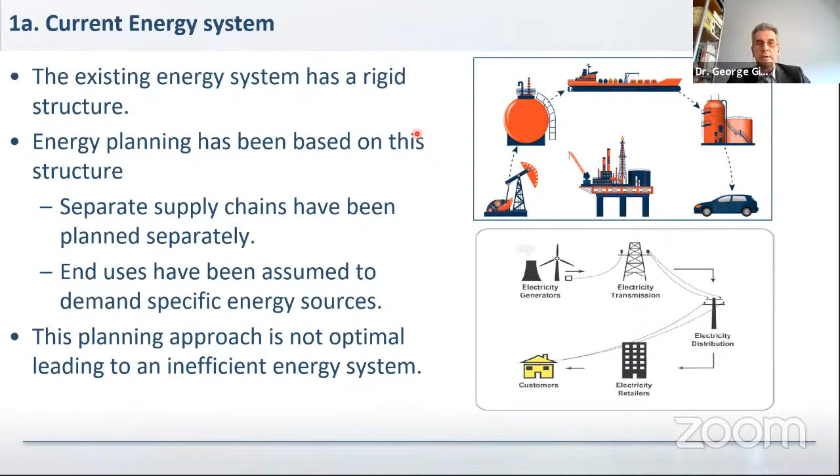But what we can see is that this overall planning approach, and the approach of operating the energy system, is not optimal. So it leads to an overall inefficient energy system. That's why we're talking about energy system integration.

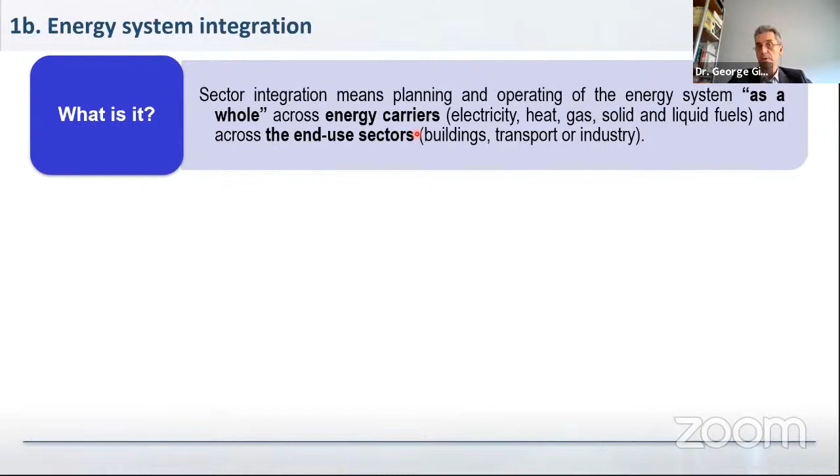So we are talking about planning and operating the energy system as a whole, as it should be, across the different energy carriers. We're talking about electricity, heat, gas, and solid and liquid fuels together, but also the end-use sectors: buildings, transport, or industry.

And why do we do this? Because in this way we will be able to allow the optimization of the energy system as a whole. So basically we'll be able to exploit synergies between sectors, and also help link new technologies, new processes, and new business models. We're talking about ICT, information communication technology.

We're talking about the digitalization of the energy system, the use of smart meters, the use of smart grids, and the flexibility market. So we're talking about new business models of working in the energy system, which can help in the overall optimization.

Is there an example? The easy example is the electrification of transport, which we are all talking about at the moment. It's not only the transport sector which is affected, it's the power sector which is affected, because we have new load curves and new demands that have to be satisfied. It's also the oil and gas sector that is affected, and the biofuels, because there have been a lot of plans for biofuels, for instance in Europe. So this could be affected through transport electrification.

And then we also have the other demand sectors, so the building sector, because the charging points could usually be in our houses, in our homes. So of course the load of the building sector would be affected.

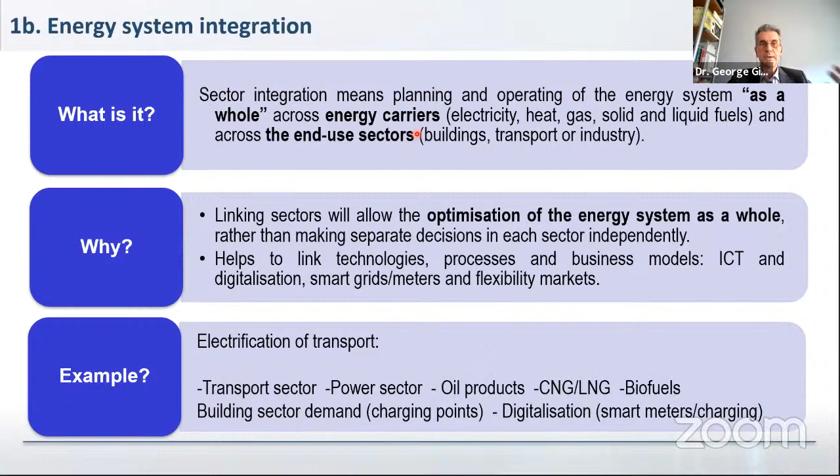And then we're talking about digitalization and how this can be integrated. Because how could the pattern of charging, or smart charging, actually contribute to the operation of the power system, utilizing car batteries as storage devices in the system overall? So this gives you an idea of how important this would be.

Dr. Ahmed mentioned the EU strategy for energy system integration as part of the European Green Deal for decarbonization of the energy system overall by 2050 in Europe. And what can be the core concepts overall?

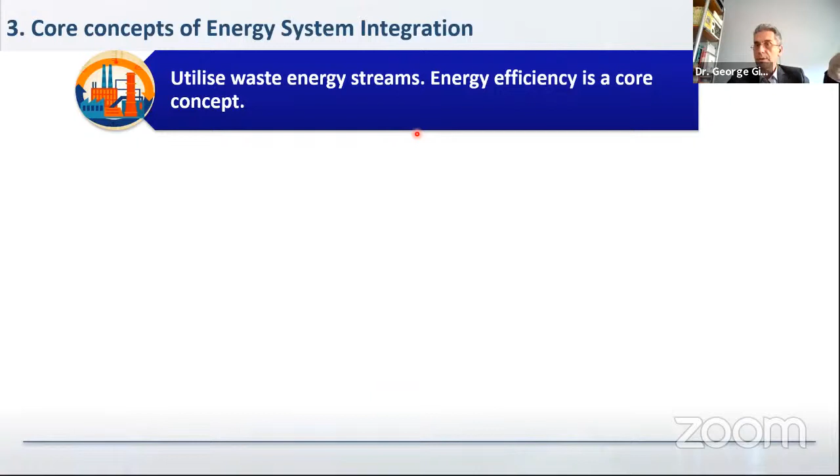What we're always saying in energy system planning is that energy efficiency is important. So the first step would be to utilize existing energy sources in the most efficient way, and to utilize waste energy streams—waste heat in industry—and use wastewater treatment as well, using energy from that.

Direct electrification of end-use sectors by utilizing more electricity, which is becoming cheaper because the cost of the technology is being reduced. This helps us put aside more polluting fuels that are being used in the end-use sectors. Use of low-carbon fuels, or renewable fuels generated through renewable energy, including hydrogen, for other end-use applications.

And what I've mentioned is the use of this multi-directional system. So far we are used to having an energy system where suppliers provide energy to the consumers. Here we're talking about new concepts.

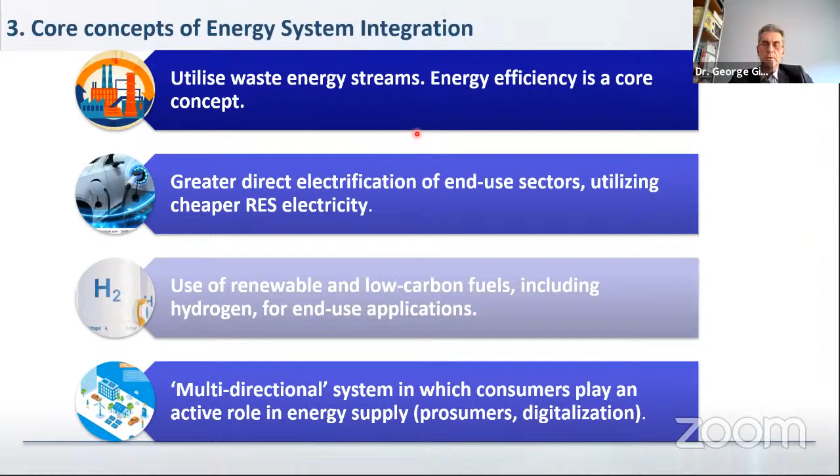We're talking about prosumers, so each one of us could basically consume and produce at the same time, contributing to the energy system. We have to take into account the tools offered by digitalization, the possibility to operate in a smart way, utilizing local generation of energy, not only electricity but energy in general.

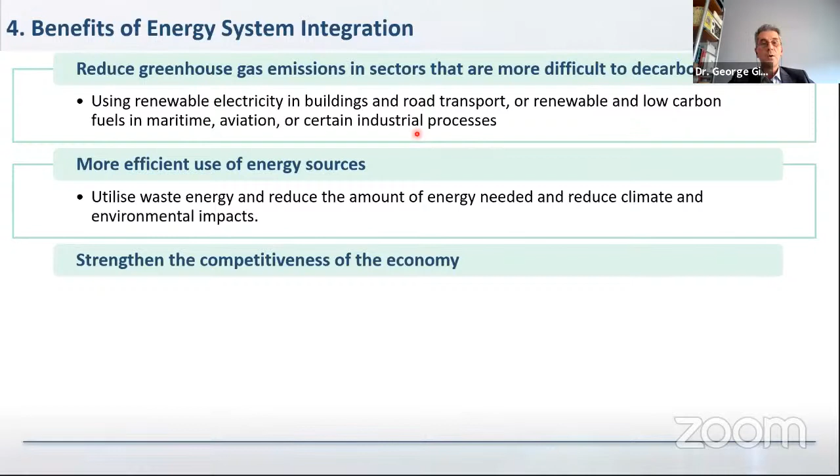What could be the benefits? The first would be environmental effects, which will be minimized—reduce greenhouse gas emissions by the use of renewable energy, but also utilize more efficiently the energy sources we have, utilize waste energy, waste heat, increase energy efficiency overall, strengthen the competitiveness of the economy by producing more sustainable, more efficient technologies and solutions, and provide additional flexibility of the system.

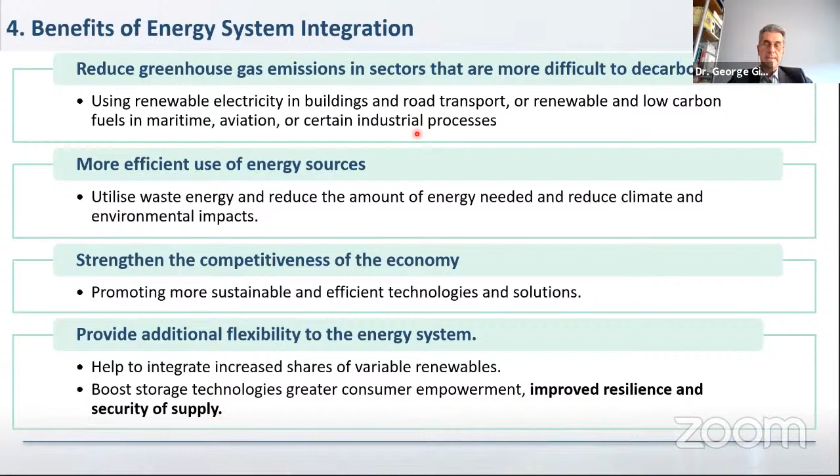We'll be talking about flexibility, especially in the power sector, quite a lot, but this can help integrate a larger share of renewables overall. It can boost storage technologies, and it can also improve the overall resilience and security of supply of the system by utilizing local energy sources and making sure that the system operates in a stable way.

In order to have such an integrated energy system, we need an integrated energy planning approach overall. We need a large amount of data, and a large amount of good data. Planning generally demands a lot of data, but if you do an integrated system planning, you need all the data from the different sectors.

We must take into account that it is an interdisciplinary and multi-sectoral approach. We need to really break down the barriers that exist between sectors and make sure that we collaborate, so that we can have a system planned based on the principles of sustainability, reliability, and affordability overall.

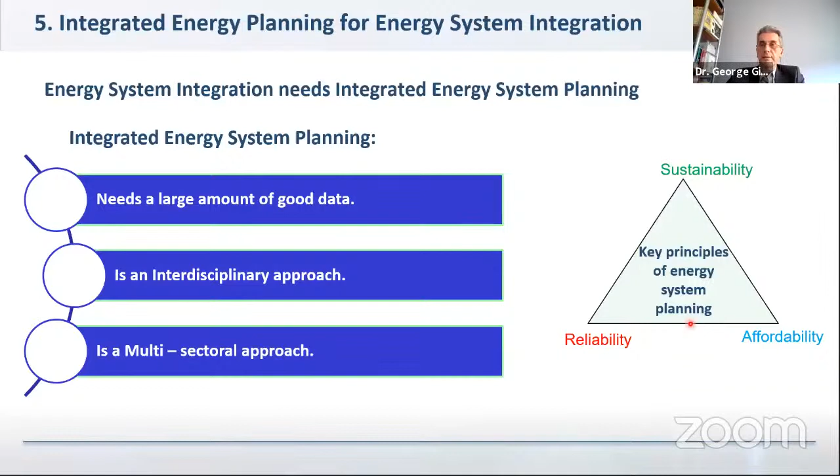Integrated energy system planning should take into account, first of all, an integrated energy system model. We have to look at all the different steps of extracting, transforming, transporting, and utilizing energy in the different sectors. We should also take into account decentralized energy generation, and the options of energy efficiency in the end demand sectors.

In specific sectors like the power sector, where variable renewables can play a significant role, we should focus in more detail by doing detailed power sector modeling, in order to see exactly how technically the system can operate, especially in cases with high variable renewables and high distributed generation shares.

In all these processes, we need to examine the effect of greenhouse gas emissions overall. We shouldn't forget that energy is an integral part of the economy, so the effects of the energy system on the overall economy should be taken into account. At the planning level, this means we should integrate macroeconomic modeling into our approach.

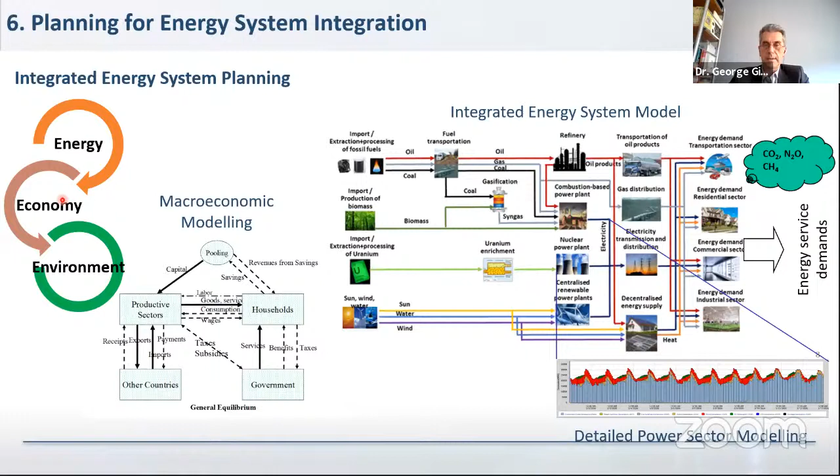To make sure that the effects of a changing energy system can be properly taken into account in the overall economy operation, within the current project we're basically utilizing such an approach for the update of the National Energy Strategy for Egypt, in the time horizon to 2040.

We're using an energy system model, based on the model generator called TIMES, developed by the IEA, which focuses on the energy system as a whole. We're also utilizing a macroeconomic model, medium to long-term horizon, in order to see what kind of effects a change in the energy system would have on the economy.

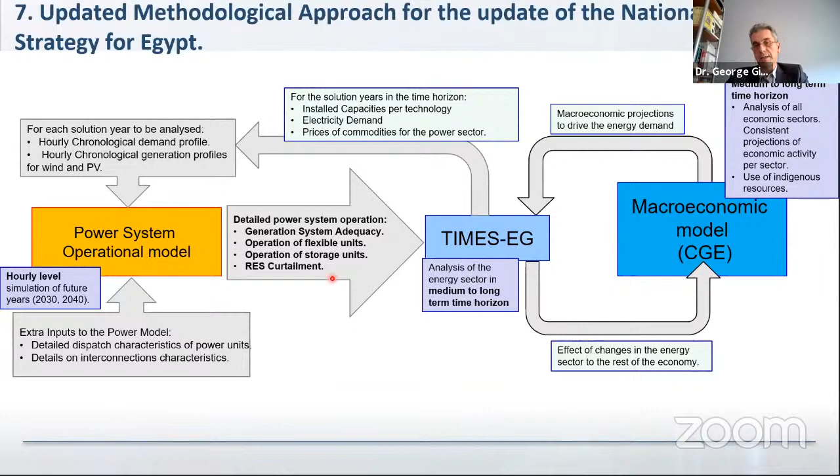We're also looking into a more detailed analysis of the power sector with a power system operational model, which does an hourly level simulation of the power system, to see if the solution, especially in the case of high variable generation, is technically feasible, and to examine in more detail the issues of generation system adequacy, flexibility of operation, storage units, and curtailment—the loss of energy generated by renewable sources in the system.

So overall, what are the advantages offered by integrated energy system planning? First of all, we can analyze technology and fuel competition and take into account fuel switching overall, model distributed generation—quite important especially in the case of variable renewables—and then integrate renewable energy, not only in the power sector, but also biofuels, with interlinkages to land use and water use.

Biogas, for instance, could be locally produced and then inserted back into the gas network, and also hydrogen produced by renewable electricity and then inserted into the gas network to be transported and used elsewhere.

Overall, integrated energy system planning will improve security of supply and system resilience, and the demand sector is an important source of flexibility in such a system, especially in the power system. Digitalization will play an important role here, and integration of local and mainly renewable energy resources in the system could basically improve security of supply overall. We should also look beyond the energy sector, considering water needs for the power sector and the overall water-energy nexus, as well as the risks to hydro operation from climate change and more frequent droughts.

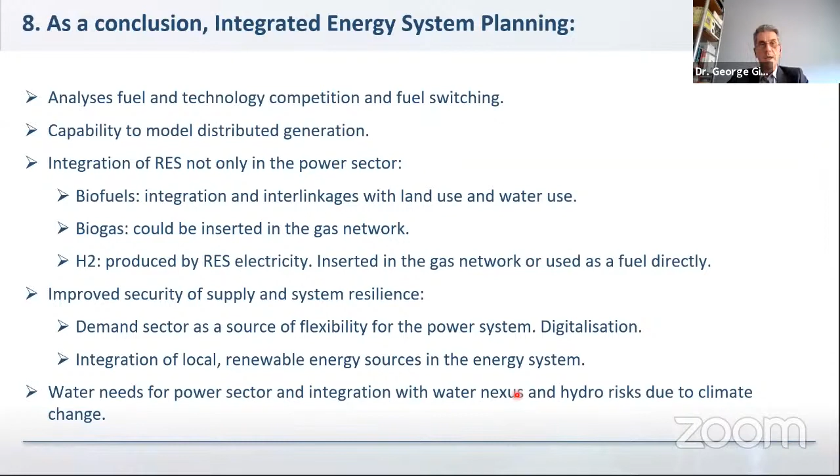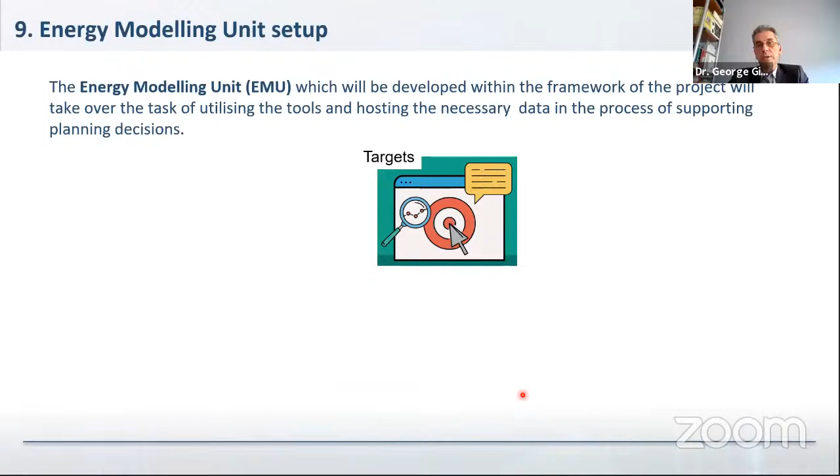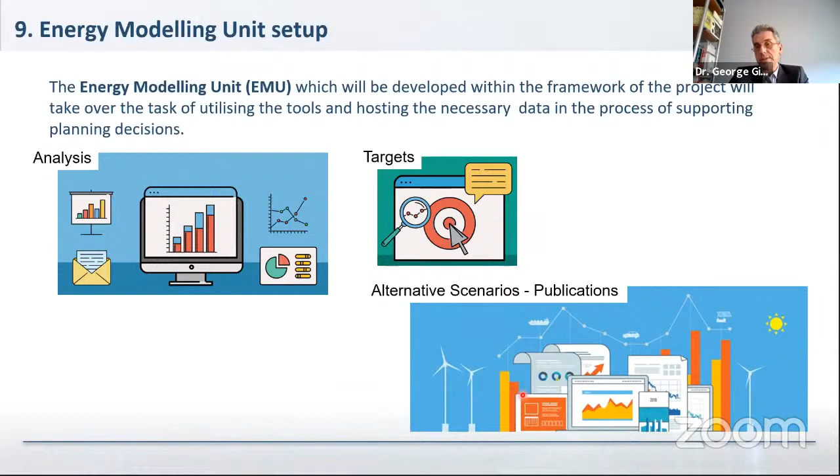Within this project, we're also planning to formulate an energy modeling unit. Based on tools that can provide the power to do integrated energy system planning, the project will set up this unit, which will be able to perform basic analysis, analyze alternative scenarios, and produce publications in the form of annual energy outlooks of the energy system overall. This would be a very useful background to see how the energy transition can take place in a medium to long-term horizon.

Thank you very much for your attention, and if there are any questions, I'll be happy to answer.

Thank you very much, George, for a very informative presentation, and thank you for pointing out the importance of integrating digitalization in the ICT sector with the energy sector, which could play a crucial role, specifically as you mentioned, energy transition moving towards the concept of the prosumer - a consumer who doesn't just consume energy, but where energy moves in two directions, from utility to customer and from customer to utility, showing how intimate this relationship is becoming. Also, renewable energy integration is not just a challenge for the energy sector, but for all sectors, like the waste sector - how we could produce biofuels from waste, and how we could use distributed renewable energy systems.

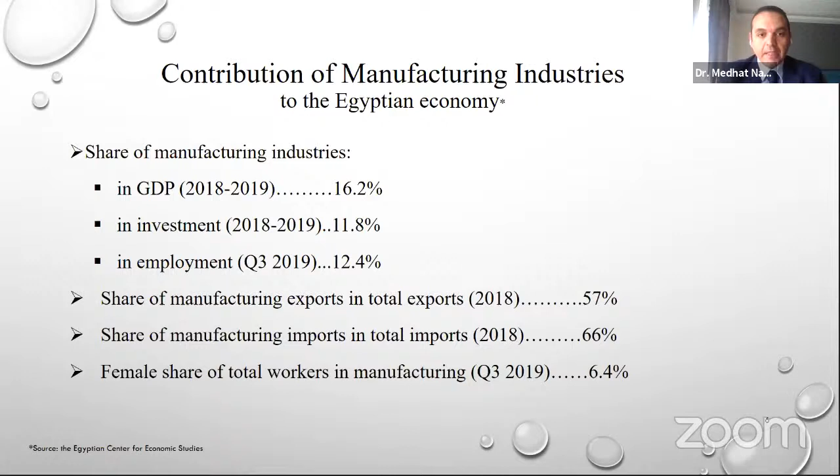So I'm taking you to the main factors controlling the manufacturing sector, the industrial sector at large, with specific interest in the manufacturing sector, the heavy consuming sector, of course.

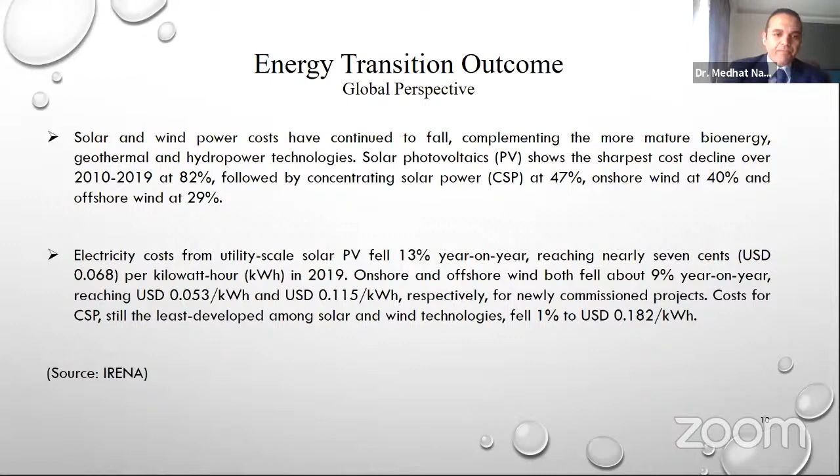This is also a very good example. By replacing the costliest 500 gigawatts of coal capacity with solar and wind, we would cut annual system costs by up to $23 billion per year, and yield a stimulus worth up to $940 billion, or around 1% of global GDP.

These numbers should be conveyed to the Egyptian market in the right way. Replacing the costliest coal capacity with renewables would also reduce annual carbon dioxide emissions by around 1.8 gigatons, 5% of last year's global total emissions.

By 2021, up to 1,200 gigawatts of existing coal-fired capacity would cost more to operate than a new utility-scale solar PV would cost to install. And you all know installation cost is the highest. So continuing cost decline confirms the need for renewable power as a low-cost climate and decarbonization solution, aligning short-term economic needs with medium and long-term sustainable development goals.

Next, please. I think we have done it, so this is the last slide. Thank you so much for having me again, and I'm open for any discussions and questions regarding these matters.

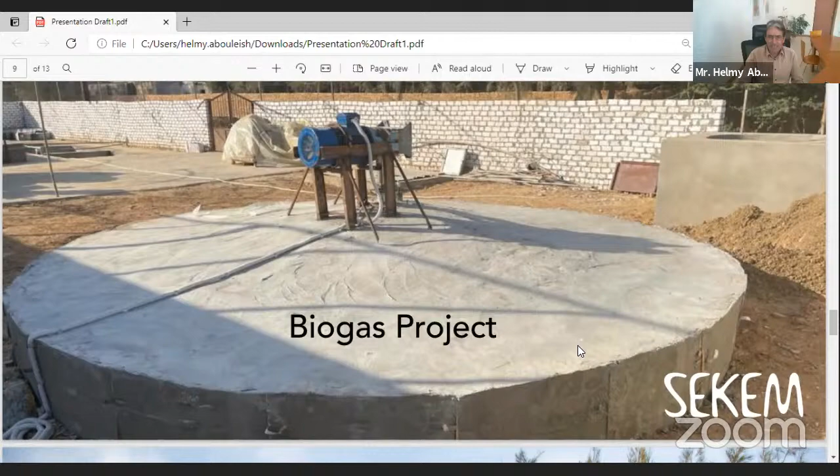Let's go on and mention that we also started a biogas project there, because we want to produce our own biogas from our own liquid animal manure, which we then use for heating, cooking, and so on, and for fertilization. We don't have numbers yet - I'm happy to share them with you as soon as we have them. Then we move on.

We said this farm, 2,400 acres, will ultimately by 2027 be home to 1 million trees, which is our target. We have established nearly 170,000 trees already in these last 2 years, and they sequester 30 kilos per tree, about 5,598 tons of carbon per year. This equals the average emission of 1,900 Egyptians.

We also use our own solar photovoltaic modules, which we designed and installed together with Heliopolis University. Over the last 1.5 years we installed 1,638 kilowatts of photovoltaic modules on this farm, avoiding diesel generation equal to about 2,212 tons of carbon emissions, which equals what 800 Egyptians emit per year.

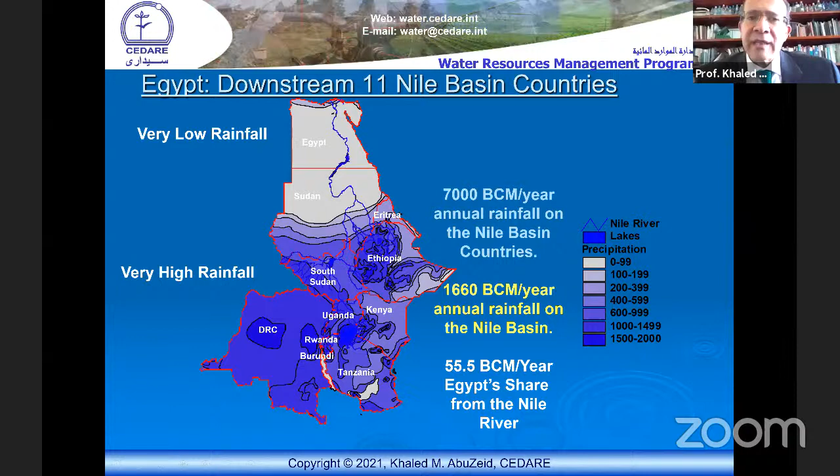Egypt uses out of this 55.5 billion cubic meters per year. The map illustrates how Egypt depends mainly on the Nile. 94% of Egypt is desert, and only about 6% is the green valley of the Nile, with the Nile Delta in the most downstream part. So the Nile River is the main source of water for Egypt.

Of course, this water flows by gravity, so it doesn't need energy to flow downstream to Egypt. This is an advantage that could not be replaced by any other resource, which would require a lot of energy to produce, such as desalination, groundwater development, or any other resource, even wastewater use. So this shows the importance of the Nile to Egypt.

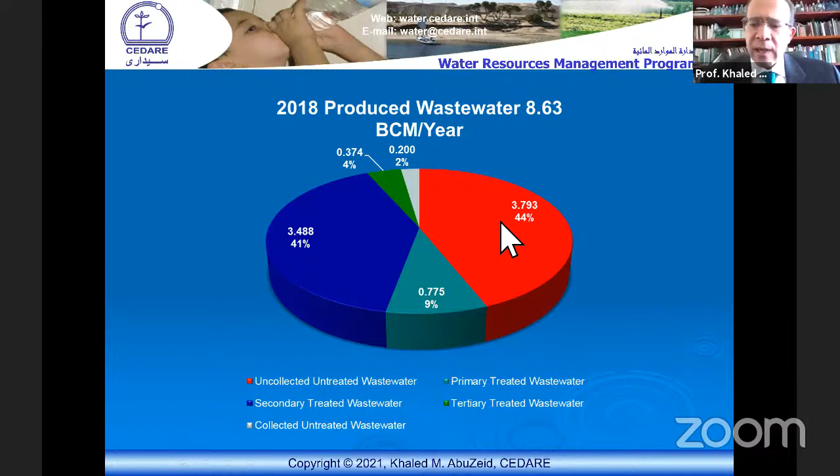The forecast for 2030 is that the current municipal water, which is about 10 billion cubic meters per year in 2018, is going to increase to cope with the increase in population, reaching about 15 billion cubic meters per year in 2030. Therefore, the wastewater is also going to increase from 8 to 12 billion cubic meters per year. So you have a potential resource. It is an unconventional resource, but it's going to be important in the future.

The plans in the future are to have at least secondary treatment for all the wastewater. This tells us that we might have about 9.7 billion cubic meters of secondary treated wastewater. There will be a part that will still be untreated because it's uncollected, treated in a traditional manner such as septic tanks, in scattered communities that are far from one another and don't necessarily need a networked sewage system. So they will remain to be treated locally by natural conditions through septic tanks. This is an amount that we cannot collect. But there will also be a part that is tertiary treated wastewater. We hope that by 2030, the collectible wastewater is actually treated to at least secondary treatment where it could be recycled.

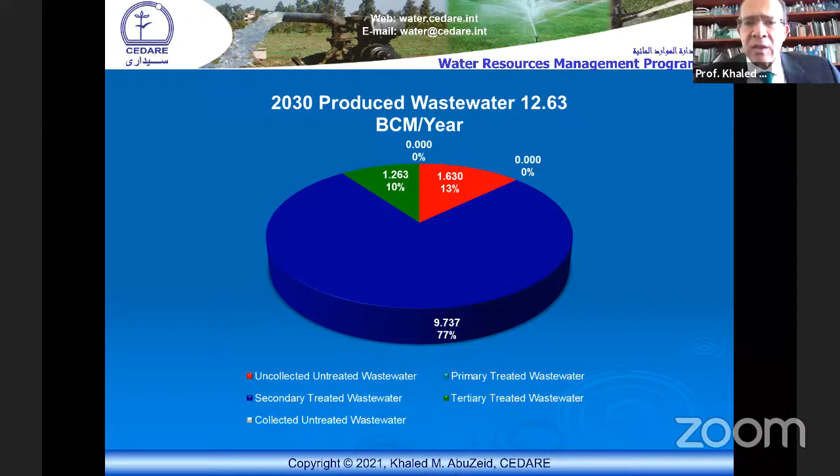We have also another direction the government is going through, which is the treatment of mixed agriculture drainage with wastewater. This is one of the plants called Mahsama, a mixed wastewater agriculture drainage reuse treatment plant, where it takes the agriculture drainage from the agriculture drains, which includes some treated or partially treated wastewater as well, and then treats that mixed drainage and pumps it to agriculture areas for reuse.

Here it is very important to mention a nexus again, another energy-water nexus issue, because within these agriculture drains we sometimes have treated wastewater. Then by this treatment plant, we are actually treating the mixture once more, but that time because of the agricultural drainage. So it's treating more of the agricultural drainage, but it actually might include treated wastewater in there.

This brings us to the question of whether we should be looking at a policy where treated municipal wastewater is used directly because it's already treated. We should not be pumping or draining it back into agricultural drains and then treating it again. This is double counting, or double treatment. This is double use of energy when we are treating already treated wastewater, but because it has been polluted again by draining it into agricultural drains.

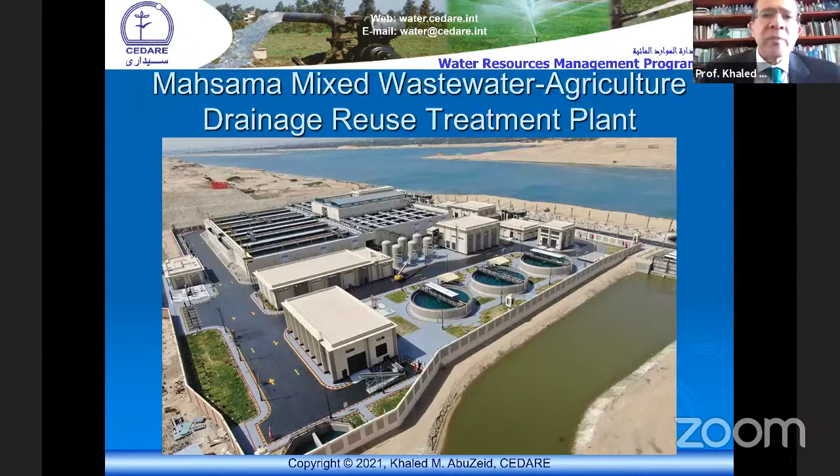So the possibility of this wastewater reuse and treatment also gives us the possibility of generating energy. Sometimes we could also generate energy from wastewater treatment processes, and this adds another variable to the nexus equation. Of course, municipal and industrial wastewater is a potential, because many times industrial wastewater is also mixed with municipal wastewater. It is obvious that wastewater reuse requires high energy costs to treat, pump, and transport water for recycling. But we should be looking at direct versus indirect water reuse, which is an energy nexus question.

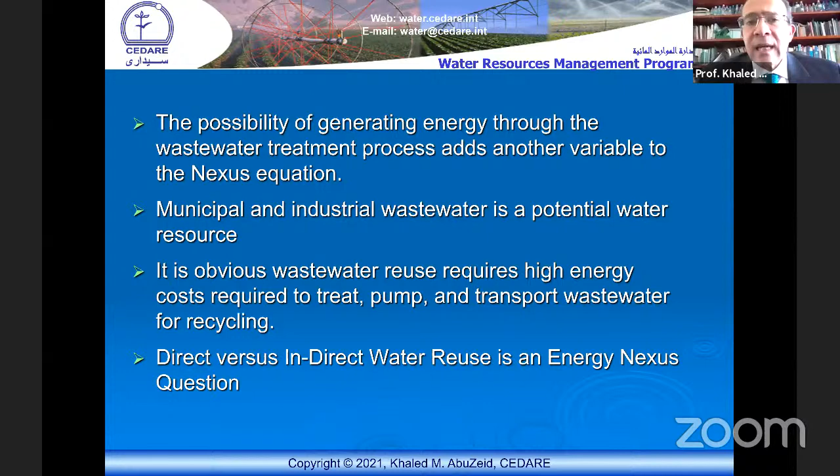If we look at another new project, there are two other similar agriculture mixed drainage treatment plants in place. Bahr al-Baqar treatment plant, which is about to be finished, will treat about 5.6 million cubic meters per day. This translates to maybe about 2 billion cubic meters per year or so. And also the Hammam treatment plant of agricultural drainage, also mixed with treated wastewater. We've heard about this project, which is supposed to supply the New Delta and the Egypt Future Agriculture Development Project.

This is the desert area that is going to be cultivated using treated agriculture drainage, in addition to some groundwater as well. Of course, the groundwater here in this area is mostly non-renewable. Ones near the Nile Delta are partially renewable, but when you go to the middle of the desert, this groundwater is non-renewable. And here we have several nexuses actually.

When we look at this, we have the nexus of using water and energy, because this is a challenge. You will be here in the north. We will be treating this agriculture drainage and pumping this water using energy again to these areas for cultivation. The canal that will deliver the water is maybe about 120 kilometers.

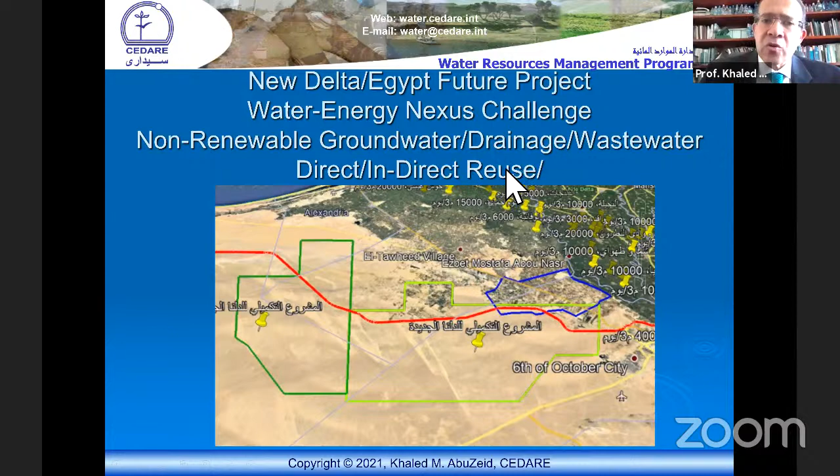And this again raises the question of comparing direct to indirect reuse, and also drainage and wastewater use versus non-renewable groundwater use, which also uses energy to pump, but it's non-renewable, which is not sustainable. And it is clean water that may be better for other uses, such as drinking purposes, water bottling, or others.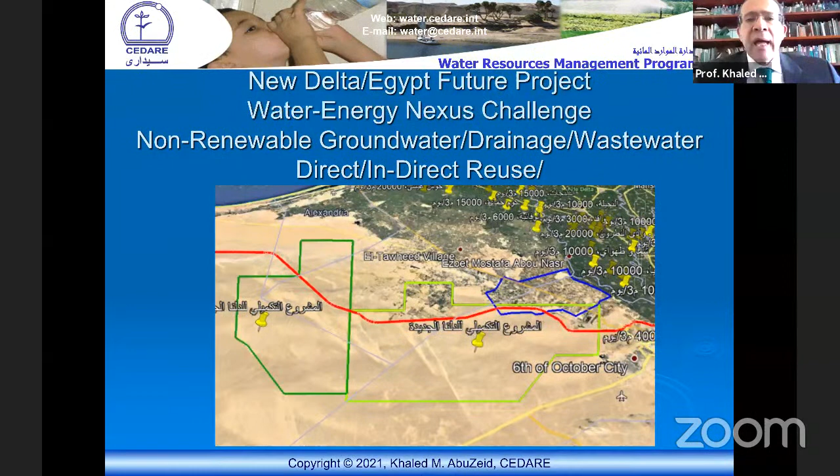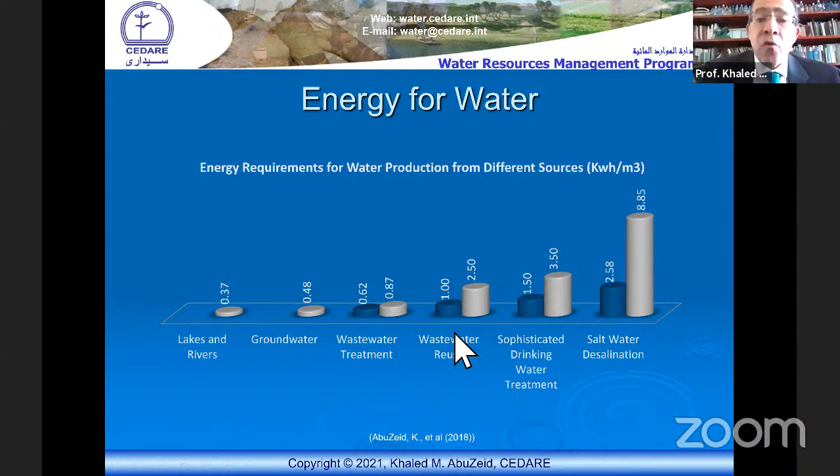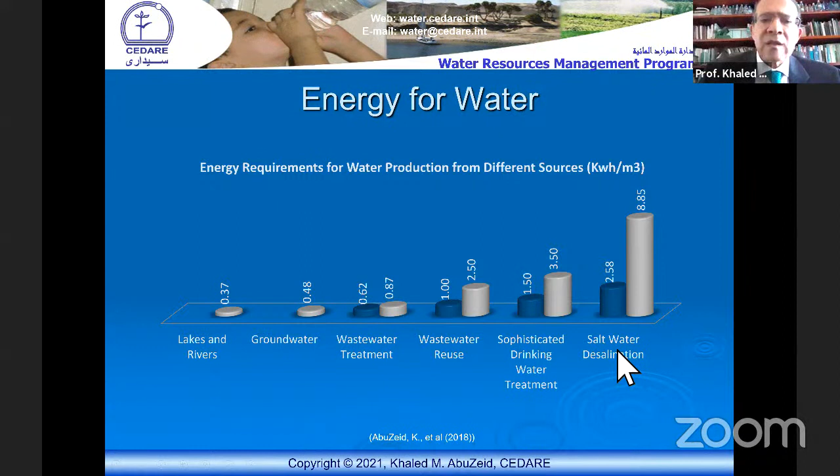If we look at the energy used for developing different types of water resources, this graph shows how much kilowatt hour per cubic meter is needed to develop water from lakes and rivers, from groundwater, from wastewater treatment, for wastewater reuse, for sophisticated drinking water treatment facilities, and for salt water desalination. This shows the different energy costs.

If we look at desalination, which is another source increasingly being used in Egypt, in 2012, Egypt was developing 200 million cubic meters per year of desalinated water. In 2015, it became 350, and now it's increasing, and by 2030 it will reach at least 1.5 billion cubic meters of desalinated water. Of course, this is a very energy intensive water development, but it will be mainly restricted to coastal areas where it is close to the shore, close to the sea, with less energy needed to pump water to far distances.

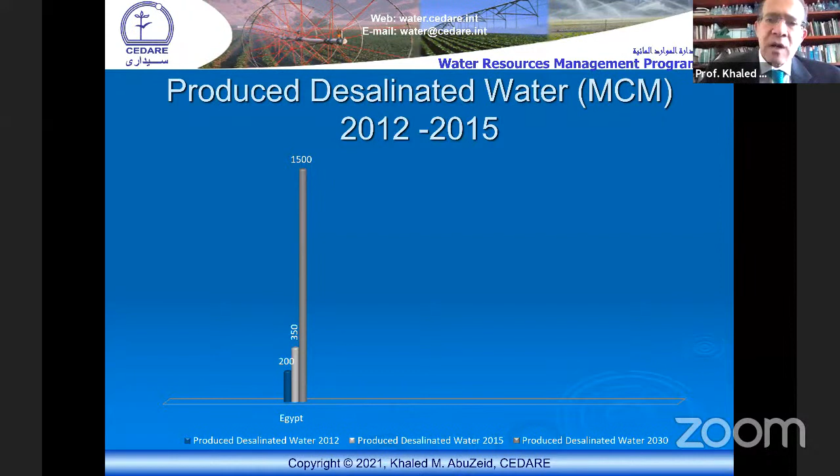Such as cities that are inland, far from coastal areas. So it's a good policy to save energy by limiting desalination facilities to coastal areas and looking at other resources for inland communities and inland areas.

This raises the question of what type of water resources should be used for what type of use - agriculture, drinking, industrial uses - and where: coastal areas or inland. We have to put that in mind and look at the water energy nexus when answering these questions.

A quick comparison of energy requirements for developing different water sources for food production demonstrates that pumping water from open water bodies, fresh surface water or recycled agricultural drainage water, at 0.37 kilowatt hour per cubic meter, would be more economical than pumping groundwater at a higher energy requirement. When renewable fresh water is exploited, reusing treated wastewater at 1.5 to 3.5 kilowatt hours per cubic meter would be more economical than using desalinated water at a higher energy requirement.

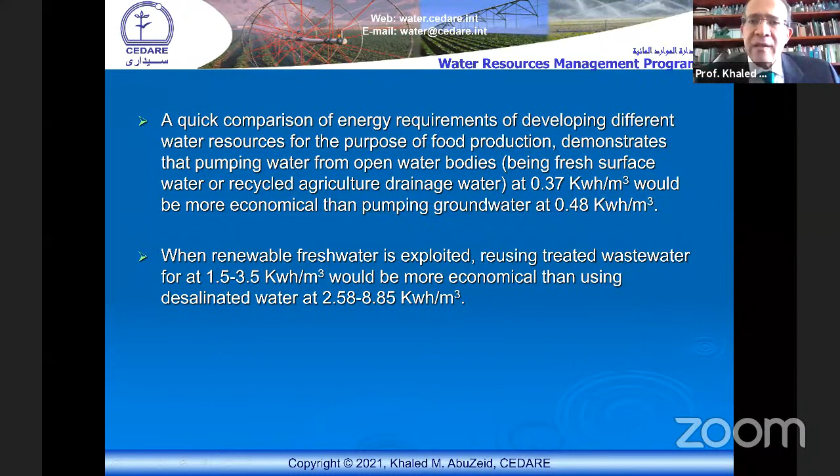So the policy decisions made today will affect the policy decisions that need to be taken in the future. This is an important factor when it comes to the exploitation of fossil non-renewable groundwater.

If we use all the non-renewable groundwater available inland, in the deserts, for a high water consumptive use, such as agriculture, this will affect future communities which will have to develop and live in these inland areas in the future.

We are increasing by at least 2.5 million people every year. So in 10 years, we are going to increase by 25 million people. Where are these people going to live? Maybe these new urban communities are going to be in these desert areas, and we are slowly encroaching into these desert areas. The only resource there inland will be the fossil non-renewable groundwater.

It will be difficult to look at desalination in the future to provide these areas with water if this groundwater is exploited. Desalination, which will be far, maybe 200 kilometers to the north, will cost not only energy and additional costs for the desalination process itself, but will require huge amounts of energy to pump this water inland, to distances that could reach 200 to 500 kilometers south.

So the decisions that we make today, looking at energy and water, are very important when we are looking at the future. What is the best use for that non-renewable resource? Should it be allocated to agriculture, a water-intensive user? Or is it better for domestic and drinking water, especially since this water is very clean and doesn't require too much treatment? The Nexus approach provides some insights to these policy decisions that need to be made.

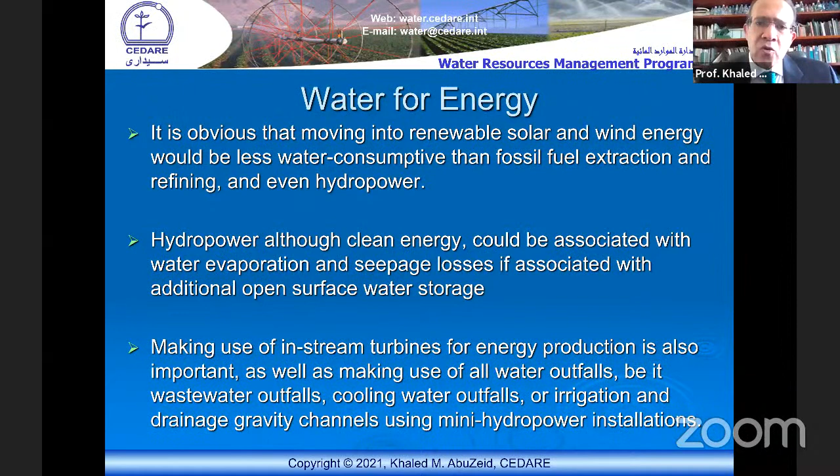I want here to address very quickly the transboundary dimension of the water-energy nexus. The transboundary nature of water resources puts another dimension to the water-energy nexus, whereby 97% of Egypt's renewable water resources originate outside the country, through the Nile, of course. An upstream infrastructure that may ensure energy security for an upstream country may not only affect water security for a downstream country, but could also affect its energy.

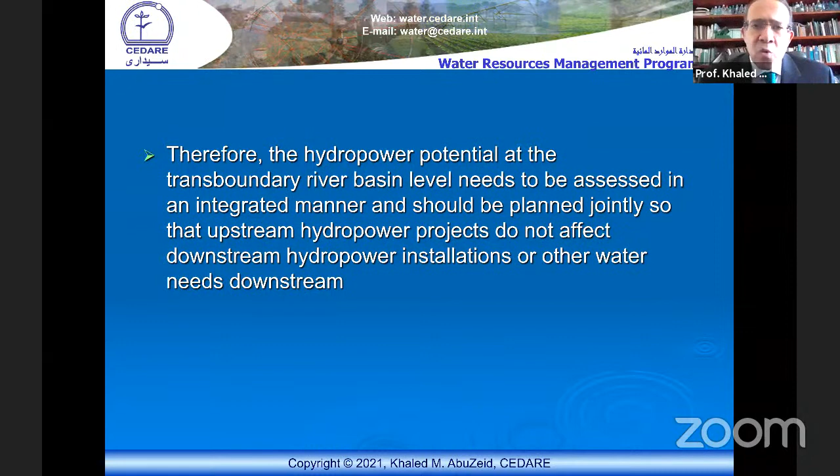Therefore, the hydropower potential at the transboundary river basin level needs to be assessed in an integrated manner. So here we don't only want to integrate between the sectors, as the subject of this seminar calls for, but also integration between the different users, between the different countries, especially when it comes to a transboundary river basin. It should be planned jointly so that upstream hydropower projects do not affect downstream hydropower installations or other water needs downstream. The Grand Ethiopian Renaissance Dam's impact on Egypt and Sudan is a very important example and case of this kind of transboundary water-energy security nexus.

Knowing and noting that this dam for the first filling is going to reach about 50 billion cubic meters of water, and the operational levels are going to range from this 50 billion to 74 billion cubic meters of water. As the storage increases, the evaporation increases and the seepage increases, in addition to the amount of storage itself, which will range from 50 to 74 billion cubic meters.

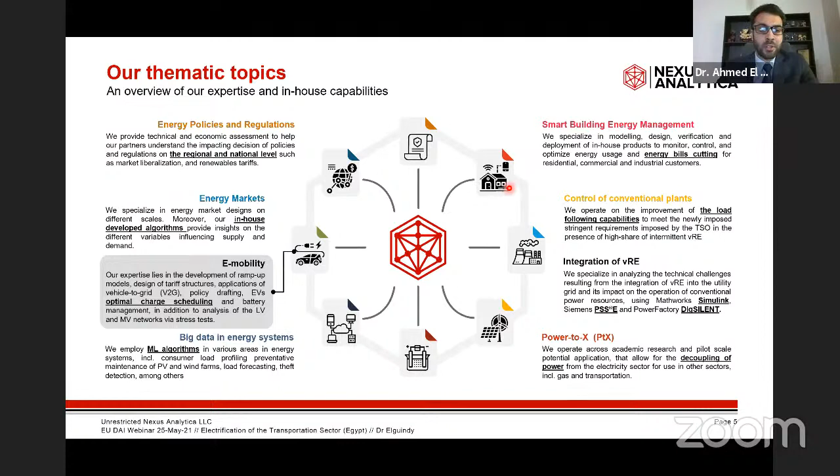We've been working with a variety of customers, not only within the Egyptian sector, but also reaching out to African countries, like the development of the national e-mobility strategy in Botswana, and various aspects related to e-mobility strategies for Morocco and Jordan, and the Egyptian sector, which will start with the World Bank very shortly.

Jumping into the topic of energy disruption, in the initial presentation we've seen there is a sort of sector decoupling between the electricity sector and the oil and gas sector, where the mobility sector is primarily powered using fossil fuels from oil and gas, while electricity consumers, considering household, residential, and commercial customers, have electricity loads coming directly from generation, transmission, and distribution systems. The point is that the assets for power generation were designed only to meet these traditional electricity consumers, and now we're trying to consider how to migrate and couple these two different sectors together.

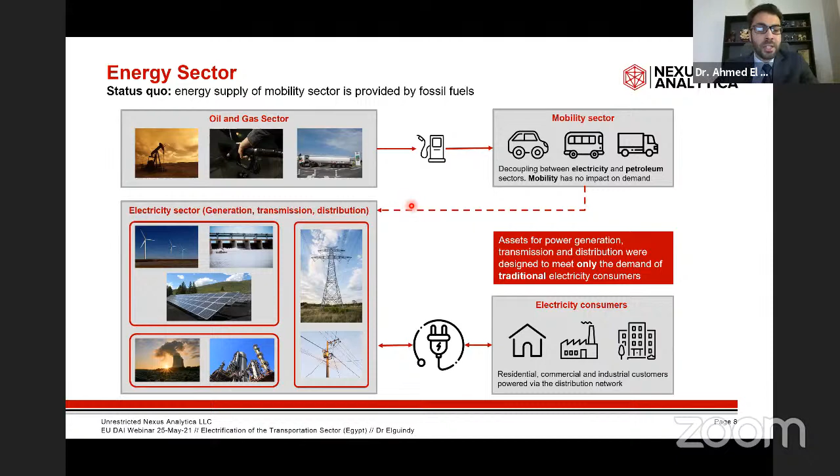The question rises, why do we actually want to do that, or what's the motivation behind it? One primary motivation relates to global CO2 emissions: looking at 2020, nearly 23% come just from the transportation sector, another 23% from the industrial sector, and 40% from the energy sector itself, given the reliance on conventional power plants powered by fossil fuels.

This increase in global CO2 emissions has led to various worldwide measures, including more reliance on renewable energy sources and trying to electrify the transportation sector, where we have seen steady growth in EV stocks since 2016, growing exponentially and now reaching more than 10 million electric vehicles.

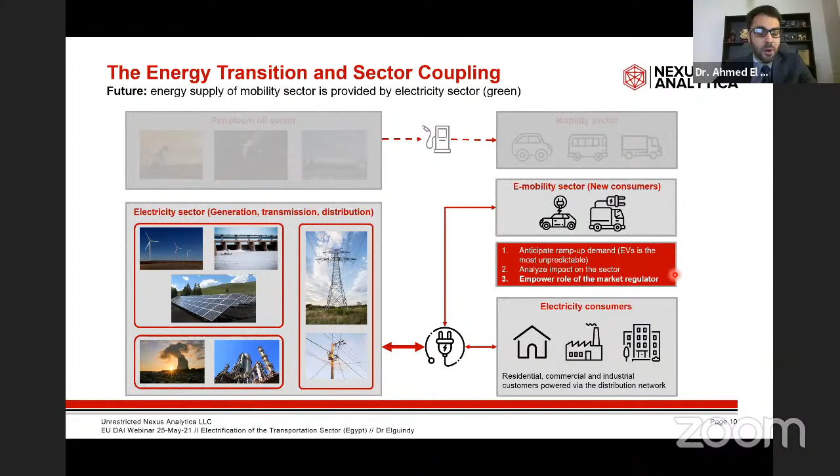This challenge within the sector raises various questions about how the electricity sector will be capable of accommodating these new loads or customers within its distribution and transmission networks, given that these systems were not really designed to accommodate these loads, which will have implications in terms of power quality and the accommodation of these different technologies.

This motivation has led various countries in the region to investigate this topic. Egypt is in fact one of the leading countries within the North African market with regard to exploitation of the sector. Tunisia, Algeria, and Libya are still trying to investigate the topic, however with no policy data available or clear initiative or strategic direction. As for Morocco, they have been investigating the topic quite recently.

Looking at the Egyptian side, we have various market dynamics which started initially in 2018 when we issued the first presidential decree allowing the exemption of EVs from customs duties. This was later enlarged to allow importing of electric vehicles as used cars up to 3 years from the date of manufacturing, which was not something we'd seen previously with conventional internal combustion engine vehicles, where owners had to be the first owner in order to import the vehicle.

In 2019, we started to see more penetration of charging point operators, with 3 to 4 companies starting to establish local public station infrastructure. There are currently 50 charging locations with more than 150 charging points in Egypt.

This number has been going up and down because there has been no clear regulatory framework involving the tariff structure or the ability for charging point operators to sell electricity to users. There was also the element of licensing electric vehicles, because until late 2020 there had been no specific regulation from the traffic authority allowing people to authorize their vehicles on the streets, and they had to renew it on a monthly basis, which was very hectic for the owners.

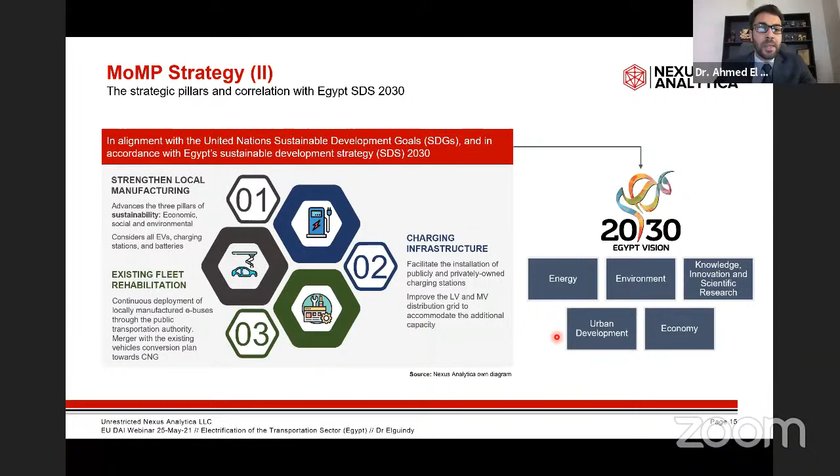Looking into the market itself and the different stakeholders placed within the ecosystem, we have the electrification sources, which are either coming from fossil fuels owned by the distribution companies and the electricity holding company, EHC. The renewable energy sources will be primarily, hopefully in the future, regulated by independent power producers, providing the energy to the charging point operators at the point of delivery.

As we've said, we currently have in Egypt 2 to 3 charging point operators maximum, in which the number of charging stations does not really exceed more than 50 charging locations and up to 150 charging spots which are located.

We will start to see in the future involvement by private consumers located at residential houses, and we'll be describing in a bit how the private sector or residential households can be part of this value chain. Currently, the focus is only by the private sector.

The government has plans to investigate the sector. At the moment, there is no roaming hub, or interoperability between these different stations. So whenever the customer or the EV driver would like to be associated with these charging stations, he will have to subscribe with each of these companies separately.

The role of the mobility service provider trying to connect the EV drivers with various charging point operators is still a role to be played. Our company is trying to play this role by implementing a specific software solution, which we'll be discussing in a bit.

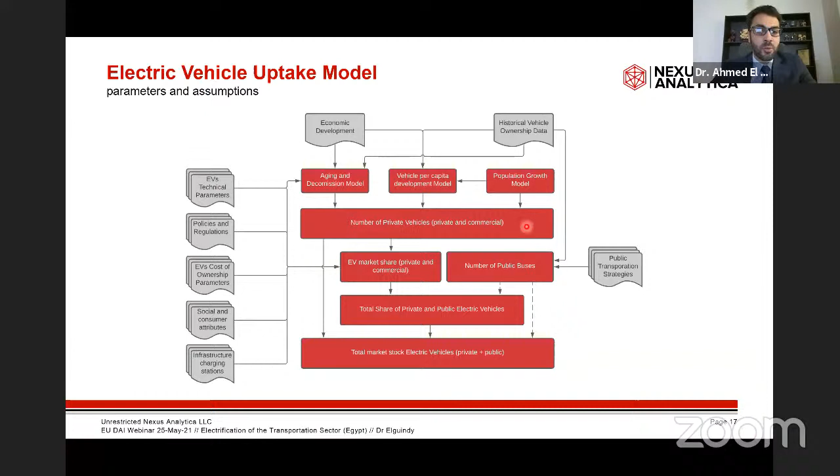We're taking into account as well the EV technical parameters, what are the current policies and regulations in the market, what-if questions, what sort of policies and regulations will be inserted and how does it affect the overall market upscaling. The reason why we're using this model was to compare it and validate it against the strategic targets which were published by the Ministry of Military Production.

The questions we're trying to answer together with the stakeholders are how can we fill in this gap, and what sort of regulatory frameworks are required, and what sort of policies and incentive mechanisms are needed to push this market forward.

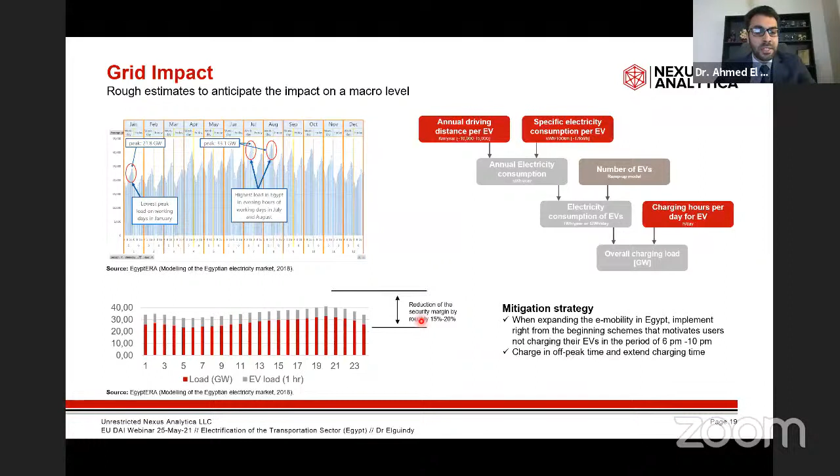If we add the overall charging load, considering the anticipation of electric vehicles, which will add up to 8 to 10 gigawatts in the worst case scenario, we will be reducing the security margin roughly by 15 to 20%. This really affects the marginal security of power generation within the Egyptian sector, and hence certain planning requirements and improvements to the grids will be needed.

Looking at the different key barriers on an international scale and in the market, we still have very high cost of electric vehicles compared to their internal combustion engine counterparts. The driving range, or so-called range anxiety by customers, is one of the primary pushbacks against the push of this technology in the market.

The charging time needed in Egypt, if you would need to charge your car at one of the publicly available stations, which are rated at a maximum of 50 kilowatts, you would require at least 1 to 2 hours to fill your battery completely.

The charging infrastructure is also scattered, existing only within Cairo, with only a few stations located in 3 different regions at travel stops or on the public highway for traveling between Cairo and Alexandria. So there are still really variable challenges.

One other challenge not really talked about so much within the Egyptian context is the aspect of standardization and the implication of connectivity to the grid. What we can see here is connectivity from a balcony on the 6th or 5th floor to the electric vehicle itself via cables. Although now, because we have a maximum of only 600 to 1,000 electric vehicles in Egypt, we don't really see these power quality aspects on the grid.

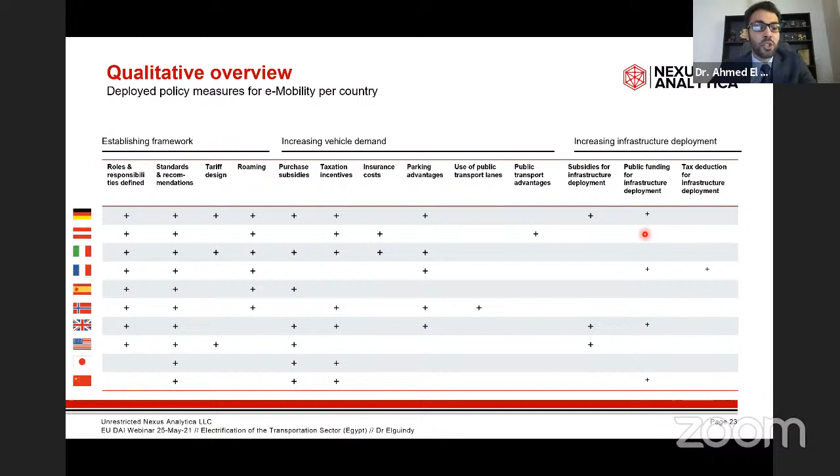Finally, increasing infrastructure deployment. We have not really seen much yet, other than some figures suggesting a goal to establish 3,000 electric charging stations in the upcoming period. However, what incentives or promotional mechanisms the government will use to enforce these technologies is still something to be investigated.

Some closing remarks from my side. We are still really trying to understand what the current business model will be, which requires policy clarity and understanding of the current regulatory framework in government, what they are actually trying to push for, defining different actors, and understanding how the model of collaboration between them will occur.

The education, awareness, and capacity building aspect, both for consumers, manufacturers, and stakeholders, requires a very big focus, because this is one of the aspects holding back the development of electric vehicles.

Finally, understanding what drivers are actually pushing the Egyptian government on the topic of electromobility and electrification of the transportation sector. Is it primarily driven by technological trends? Is it primarily to deepen local manufacturing? Is it to focus on reduction of CO2 emissions? Will it be driven by political reasons to reduce reliance on fossil fuels? So many aspects need to be covered.

However, all in all, as a final keyword, compared to other countries within the region, Egypt is really taking a leading role with regard to the electrification of its transportation sector, both from private consumers with private electric vehicles, on the electrification side of the transportation sector with e-buses, and as well as other initiatives we mentioned related to natural gas and the introduction of green hydrogen and the use of fuel cells.

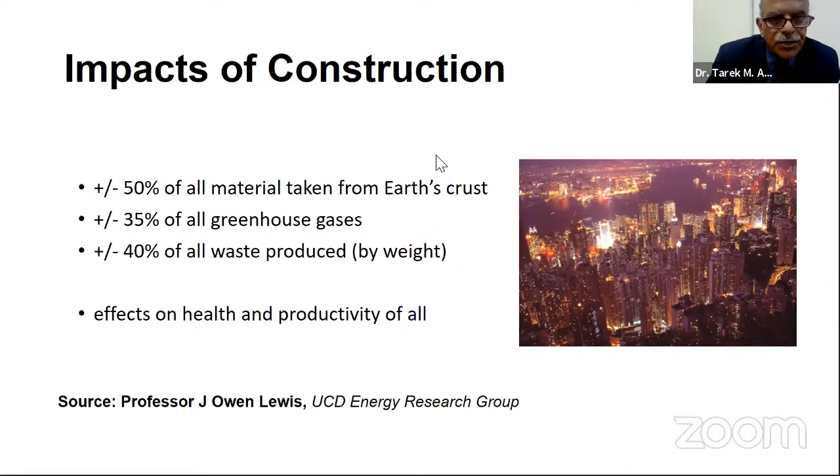Just this year, we are doing a strategy for construction waste management in Egypt. We are estimating 30 to 40 million tons per year from construction and demolition wastes. And of course, buildings are impacting our productivity and our health in residential, commercial, and school buildings, and all types of buildings. We also refer not only to buildings, but to buildings and infrastructure - roads, bridges, tunnels - and all our cities are major consumers of energy.

Next, please. HBRC is a major organization that produces and develops the engineering codes for buildings and utilities in Egypt. And actually, we have three very relevant codes that we can shed light on during this presentation.

We have the Sustainable Green Buildings Code, what we call GPRS, or Green Pyramids Rating System, very similar to the LEED of the United States. Of course, we have now a new code just developed this year for the first time - it's the Smart Buildings and Smart Cities code. Next, please.

We refer to green buildings as structures or construction processes and occupancy processes during the operation and maintenance of buildings that are environmentally responsible and resource efficient throughout the building's life cycle. Buildings last for 50, 70, 80 years - we have ancient temples in Egypt lasting for 1,000 years and more. So it's very important for us, during the design phase, planning, and operation and maintenance of those buildings, to keep in mind the energy efficiency principle.

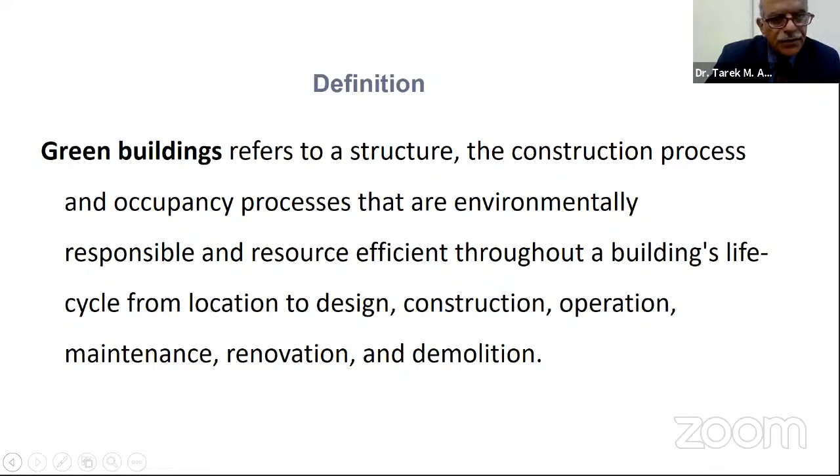Next, please. For example, now in green buildings, we can use building information modeling techniques - 3D modeling or 4D, 5D modeling - in order to simulate the airflow within the building. That will help our designers make our buildings more energy efficient for heating, ventilation, and air conditioning and similar activities needed during the design phase.

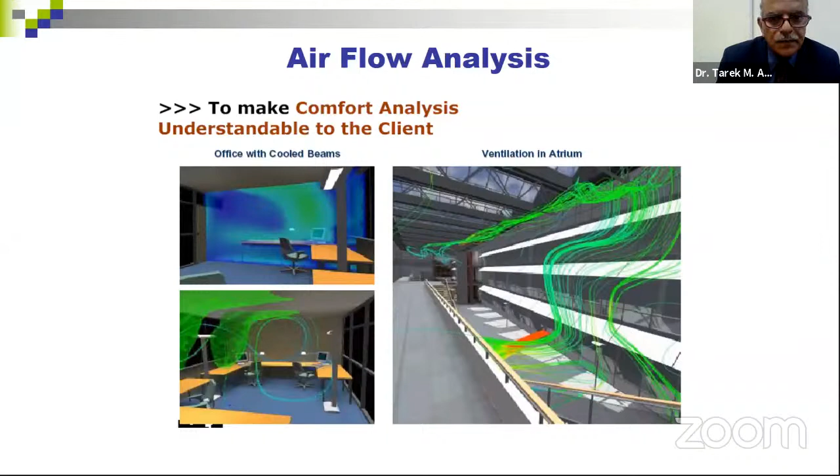Next, please. We can refer to the two main codes that are in place. Actually, one of them is mandatory - it's the Energy Efficiency Code developed in 2005. These codes have all the measures that can help the designer and the constructor create an energy efficient building.

The other code, which we call GPRS, or Green Pyramids Rating System, is a sustainability rating system to evaluate how green a building is in terms of energy efficiency, water, materials, or other aspects related to architectural design. Unfortunately, this code is still not mandatory. It's optional—the owner or constructor can choose to apply it or not. Actually, the level of application in Egypt is very weak; very few buildings have been certified through GPRS.

If you compare this to LEED in the United States, as in many countries, they have mandatory requirements for all buildings, and then optional requirements for certain types of buildings that the owner can choose to use.

If we look at the sustainability categories in GPRS, there are seven: sustainable sites—how to choose the site and orientation of the building; energy efficiency; water efficiency; materials and resources; indoor environmental quality; management protocols; and finally innovation and added value. These are the seven categories where you can attain credits for your building if you apply GPRS.

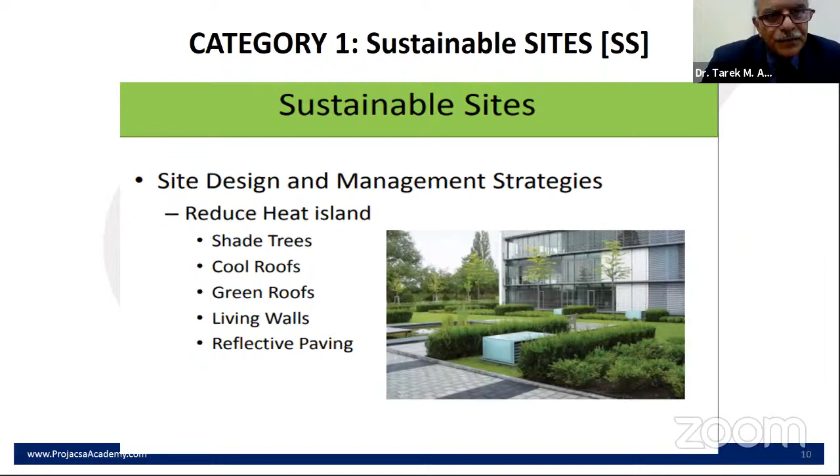Also in sustainable sites, you look at community connectivity, keeping in mind reducing transportation needs—measuring the distance to public transportation and to services in order to reduce energy consumption.

For energy efficiency, which is the most relevant to our discussion today, the green building code talks about building envelope improvement—making the envelope more airtight to reduce losses in air conditioning and heating—passive heat gain reduction, renewable energy resources which give you credits, and energy-efficient HVAC systems. Those systems cost a bit more during construction but pay back during operation and maintenance. Also using efficient artificial lighting systems balanced with natural lighting, and efficient vertical transportation for elevators.

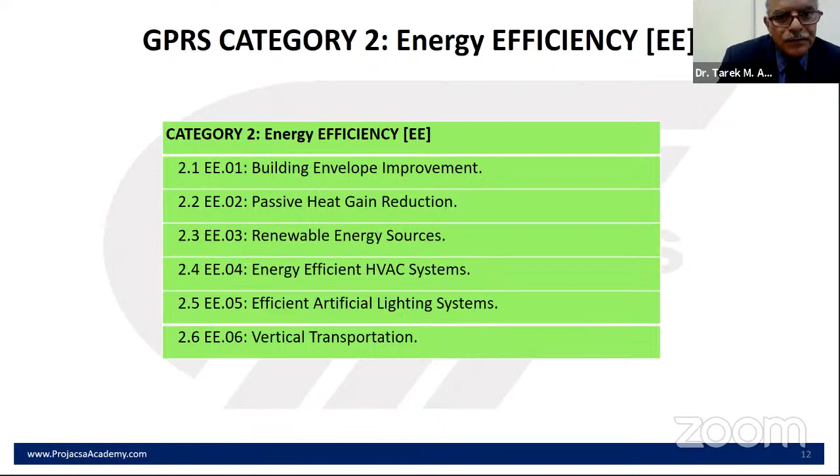The strategies we use in buildings to increase energy efficiency include optimizing daylighting to the fullest possible extent—using more daylight than artificial lighting—efficient lighting design using devices that consume less energy, and dedicated outdoor air treatment to reduce the consumption of heating and air conditioning.

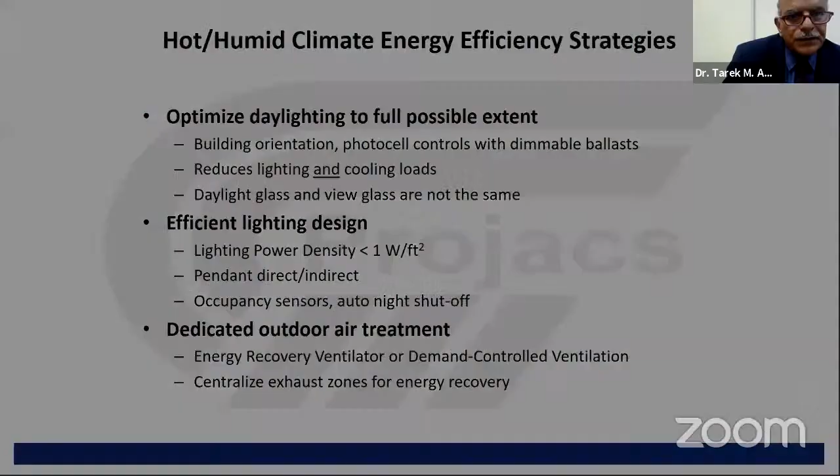Other strategies include an efficient and tight envelope with appropriate insulation for windows and the building envelope, shading, light-colored roofs, high-efficiency HVAC, optimized or automated control systems, and using Energy Star appliances—selecting the most efficient appliances within the building. All of these are strategies recommended by the Green Pyramids Rating System in Egypt.

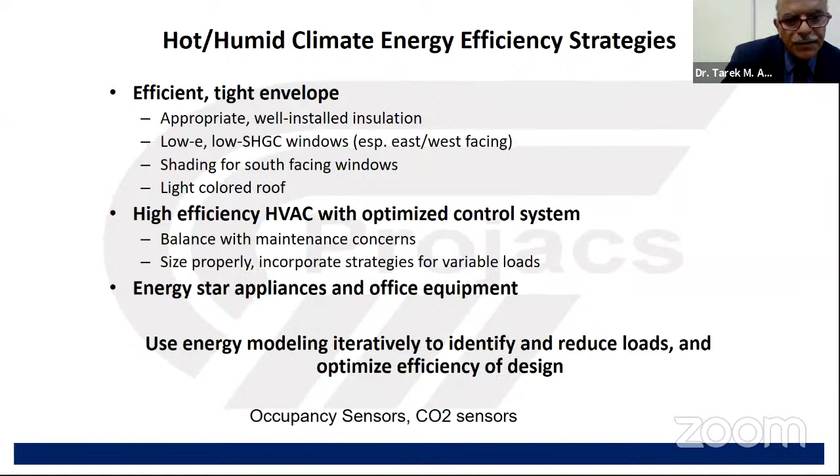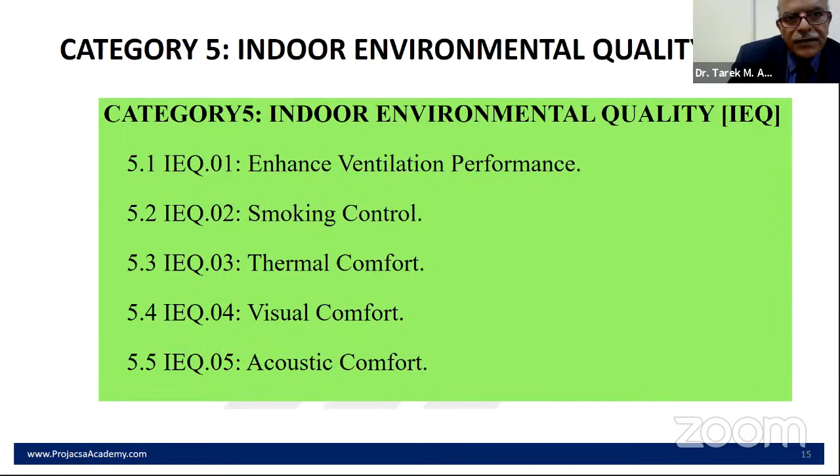Another important category in the code is indoor environmental quality. We have to monitor and improve ventilation performance for a healthier environment, control and ban smoking inside the building, and achieve thermal comfort, visual comfort, and acoustic comfort. All of these have requirements and credits given by GPRS.

Of course, building automation drives us toward the idea of smart cities and smart buildings. You have to use technology such as occupancy sensors and CO2 sensors, with an automated system that can reduce energy consumption based on the number of occupants in a certain floor, room, or area.

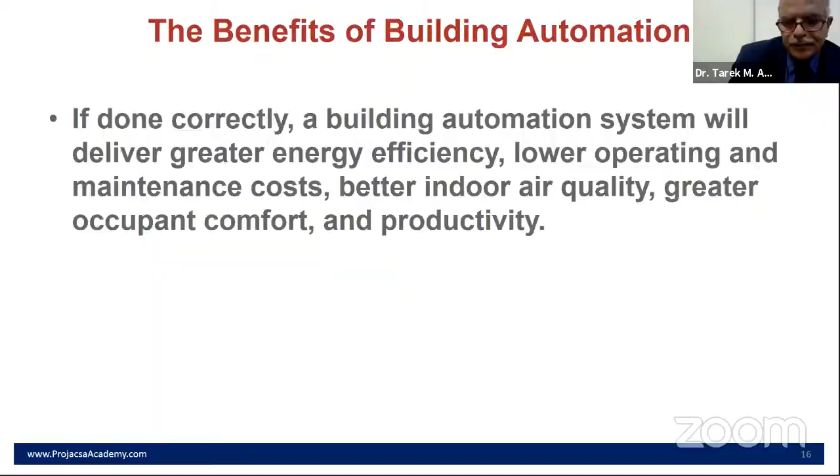I'm proposing here a model for energy and building integration. As we see in this model, our cities include buildings and infrastructure—residential, schools, factories, commercial areas. So those are the components of our cities.

Buildings produce municipal waste and construction and demolition waste during construction, maintenance, or renovation phases, and we have transportation needs within the city. So we have to look at those four components—buildings, infrastructure, waste management, and transportation—in an optimized and integrated way, with the target of reducing emissions in our cities.

We have to integrate the city design and urban planning of the city with the targets of emission reductions, reducing energy and material consumption, and that could be through the energy efficient code, the green buildings code, and the smart city code. So we have three codes that can help achieving those targets.

And then promoting energy generation. Most buildings are targeting to have PV cells or any renewable energy generation. With this model in mind, we have to first integrate the three codes together: the Green Pyramids Rating System with the energy efficient buildings system with the smart city or smart building code.

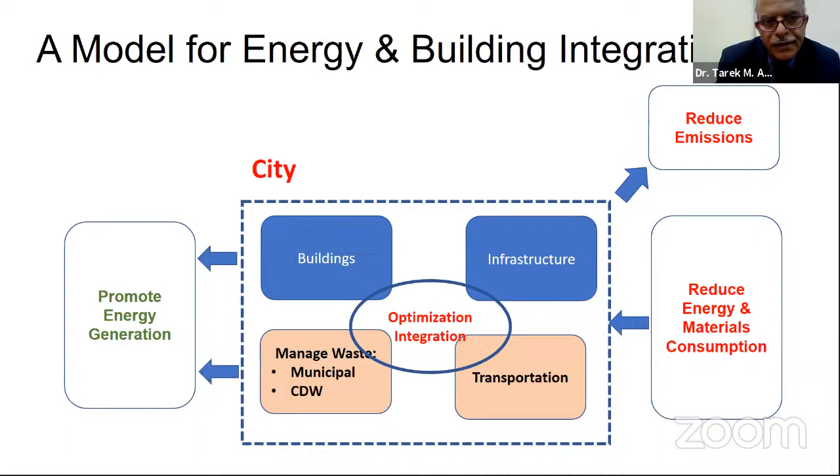By this, I conclude and thank you all. I'm ready for any questions.

Thank you, Dr. Tarek, very much for the very interesting presentation, specifically what you mentioned by the end about the need for code integration for smart energy efficiency and the Green Pyramids code. I think this is very much important to be considered, and maybe we should consider it one of our recommendations coming out of this webinar.

I will go very quickly through some questions we received, and I appreciate keeping our answers short. The first question goes to George, from Amr Khairi. There is an increasing interest in hydrogen. Can you talk a bit about the efficiency of hydrogen-based systems? Are the systems mature enough to be integrated into the energy mix?

George: Well, there's a lot of interest in hydrogen at the moment, so technologies are still being developed, but I believe that pretty soon we will have the possibility to be fully integrated within the energy system overall, because of the large interest that exists.

Okay, thank you. If Mr. Helmi is still with us - we have a question: did Sekem use solar drying in their products? Did you use solar energy in the drying process in your products and plants? He's not active.